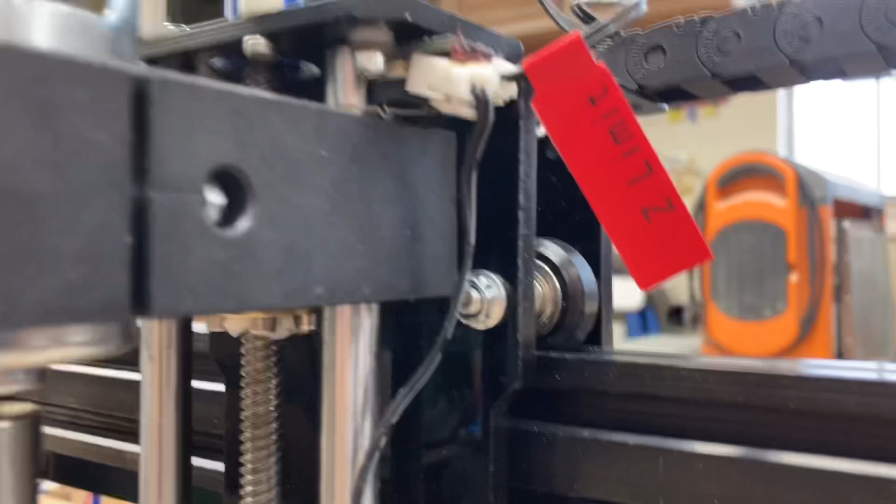Now as I move up on the Z-axis, all of a sudden it stops. Everything shut down. Why? Let's look at it. There is the limit switch. I tripped that and it stopped the machine.

Now this is an easy fix. All you have to do is go back into the Universal G-Code Sender and unlock it, which resets and deactivates the alarm. Then you'll be able to move it down again, and as soon as that switch is free, you can continue to move just as normal on the X, Y, and Z axis.

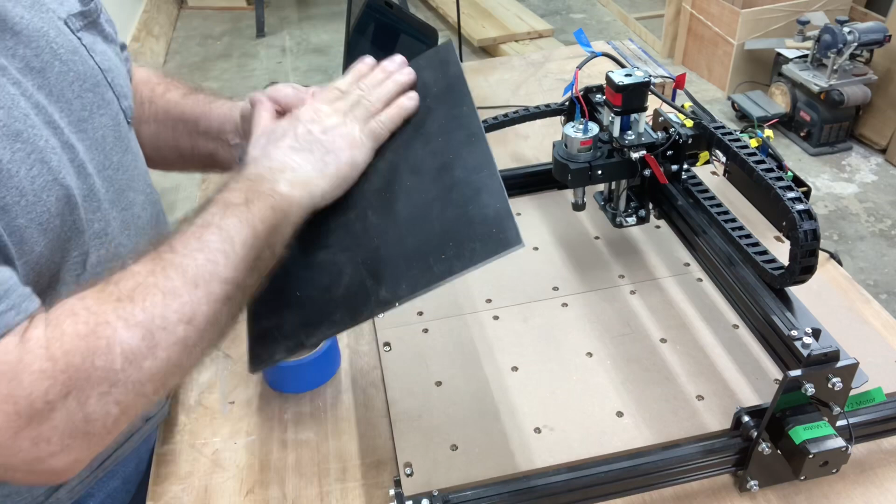The material I'm going to be using today is a piece of PVC, 1/4 inch thick. It was white originally; all I did was spray paint it black.

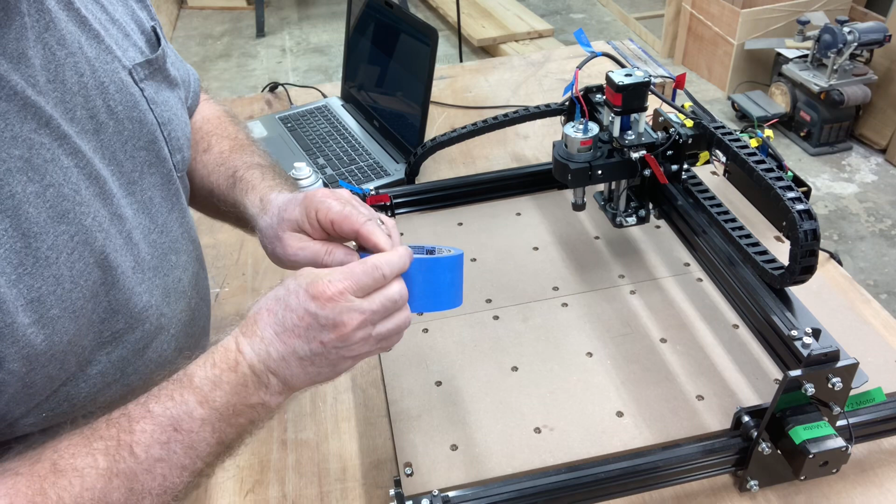I'm going to secure it to the CNC machine with my glue and tape method. To me this has been a fantastic way to do the hold down. I don't like to use clamps, and all that's necessary on a project like this is to put down, in my case, 3 strips of tape.

You do not need to cover the whole project with tape and glue. Three is, quite frankly, more than necessary — two would probably work just fine. But once I have the tape on the wasteboard, I'll repeat the same thing and put tape onto the project itself, again using 3 pieces.

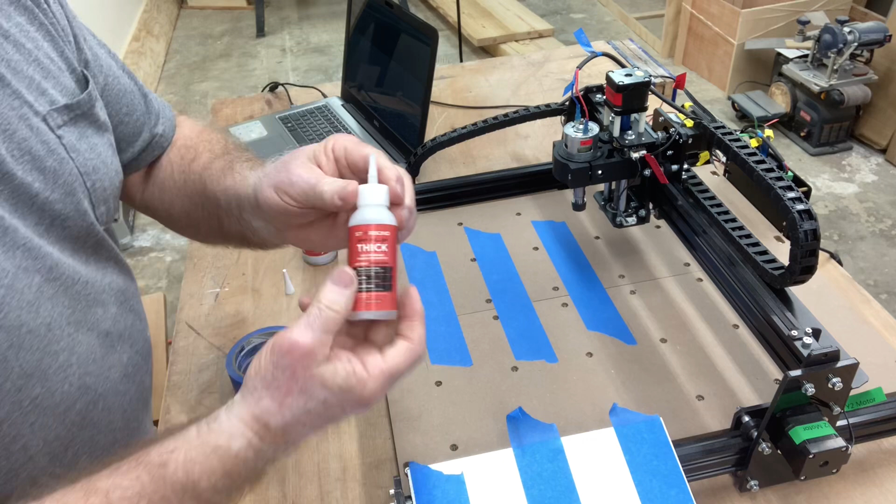Now the glue I'm using is Starbond glue, specifically the Starbond Thick glue. You can also use the Starbond thin or medium and it works just as well. I'm using the thick glue because that's what I have available, and it does an exceptional job.

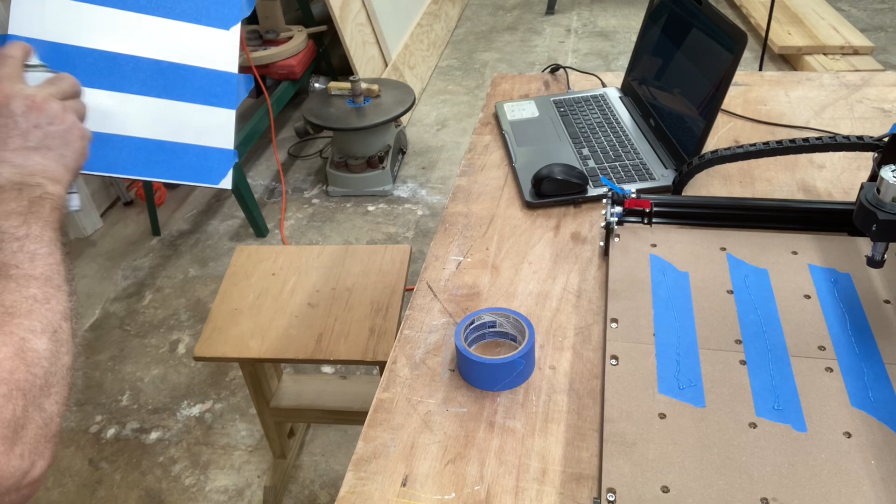All it takes is a single line of glue on the strips of tape, and then on the project board itself I use the accelerator and spray a little bit on there — it doesn't take a lot of the accelerator.

Now with this process completed, all that remains is to place the project board onto the wasteboard. You're just aligning the tape strips and pushing it into place, holding it just for a moment, and that glue bonds instantly so you're ready to carve.

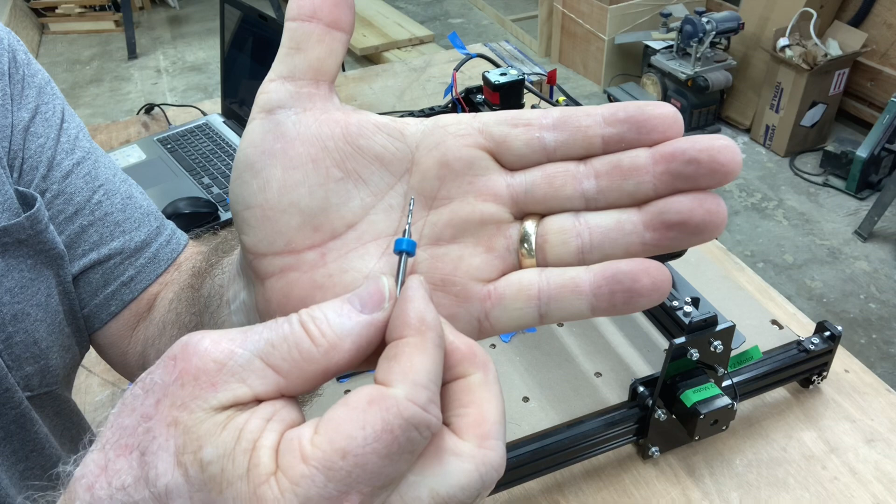Now the bit I'm using today is a 1/16 inch upcut bit, and what this will do is get that plastic up and out away from the project itself.

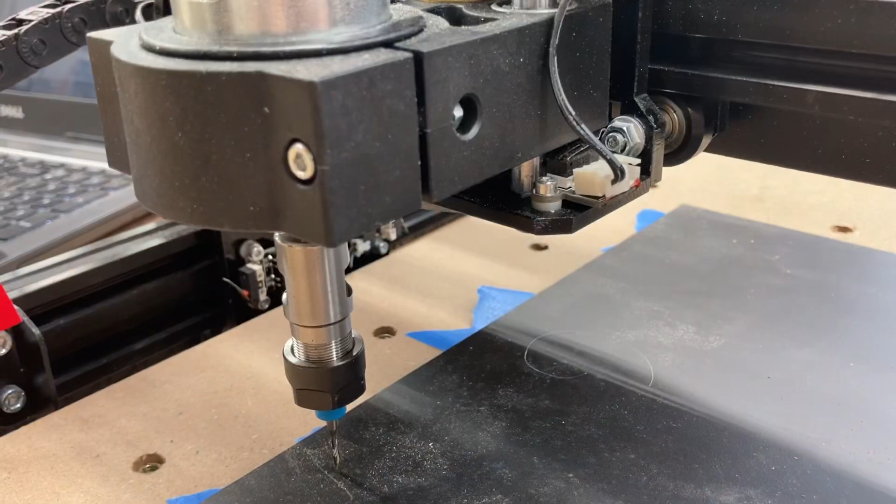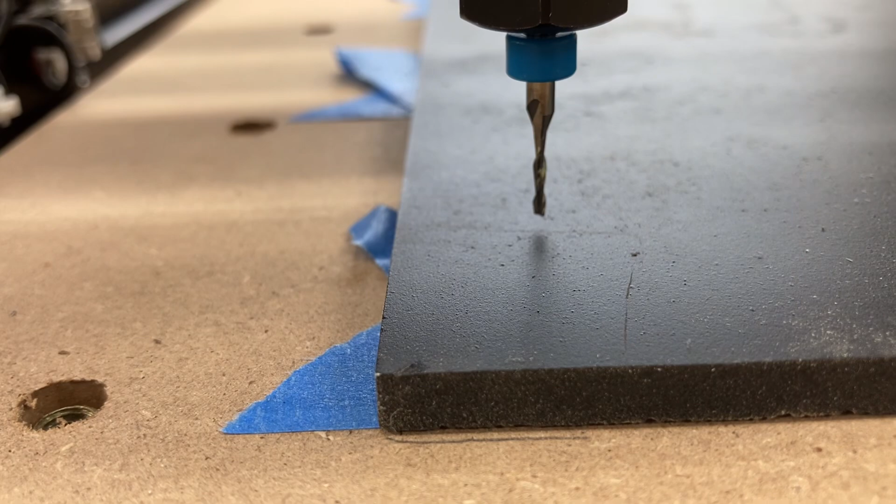Now at this point I want to go ahead and move the machine down and set the X, Y, and Z position to 0, using the mouse with the controls on the Universal G-Code Sender. Since this is the first time I'm using this machine and getting everything set up, you'll notice I'm not quite at the surface with the bit, but at the same time I have tripped the limit switch.

If I come over here and try to raise on the Z axis, nothing happens. So what I have to do is unlock this machine again, and now I can come over and raise it up.

Now what I'm going to do is loosen my spindle mount and lower it down further, and that will solve the problem. Let me grab the wrench and loosen this. We'll lower the spindle and continue on to set the Z-axis and the X and Y axis.

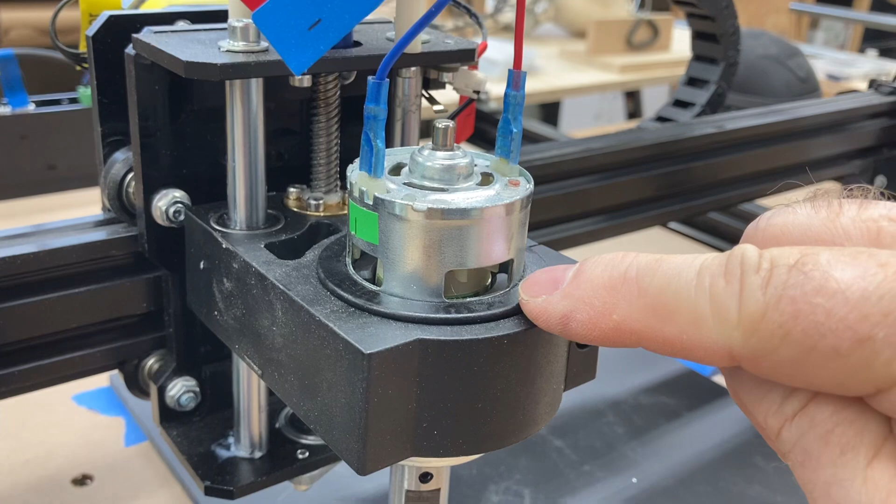So I've lowered the spindle now down till I'm right at this line where the fan is, and that's going to be low enough to be able to accomplish what I need to accomplish. Now at this point, I'm just going to go ahead and move this over to my XY0 position and get ready to carve it. Now the machine is all ready to be able to carve.

So now I want to switch the focus and talk about the actual software and how I got the project ready to carve using the Easel.

Now this is the file that I'm going to carve, and I have actually two workpieces down here. The first one I did, I actually have it set up for a 12 by 12. And when I did that, this was how I designed it. And if you look over at the preview, it worked real well and all of the lines are there.

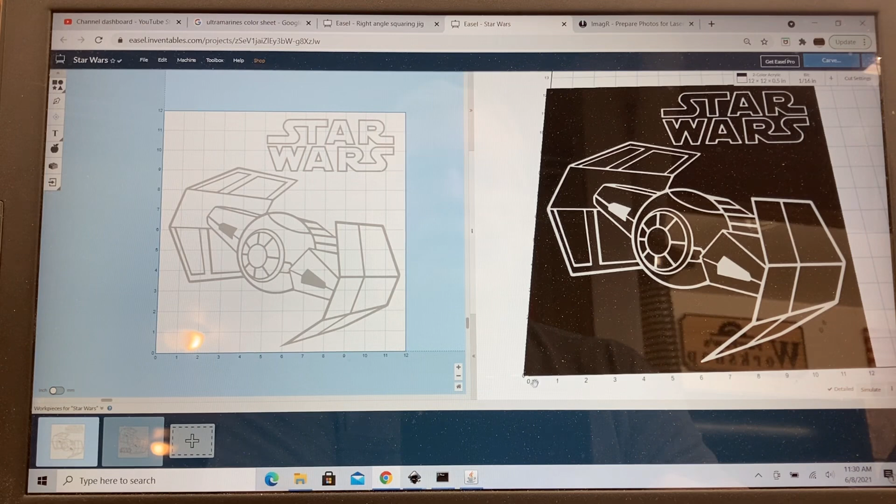When I switched over and realized that the material that I had was not 12 by 12, but actually 9 7/8 by 9 7/8, I went ahead and created my new workpiece, and I had to shrink this down. And when I did, I started to lose a lot of the detail in here. I had to change a few things. Star Wars now is actually cut out, and although this still looks really, really good, I've got to show you how I got to that point.

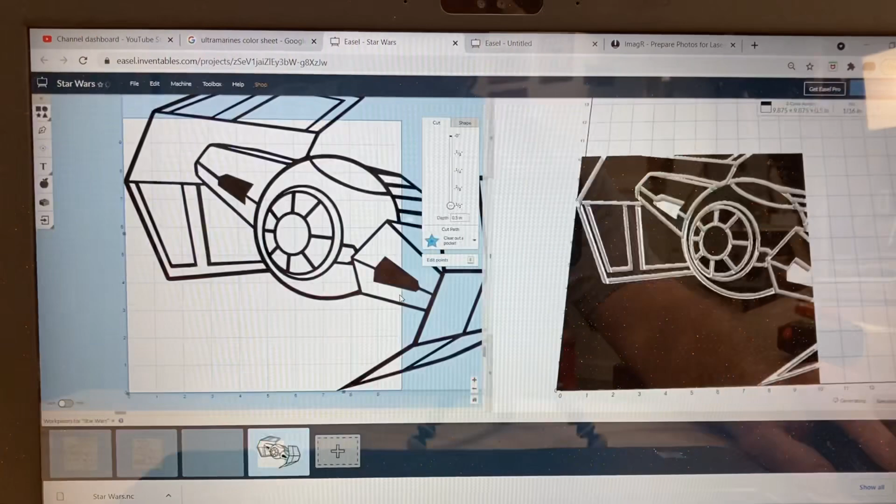So what I'm going to do is go ahead and open up a brand new workpiece, and I'm going to bring in this file. And this was an SVG file that I worked on in Inkscape. And this was the size of the original file. And when you look at that, that has all the fine detail that you want.

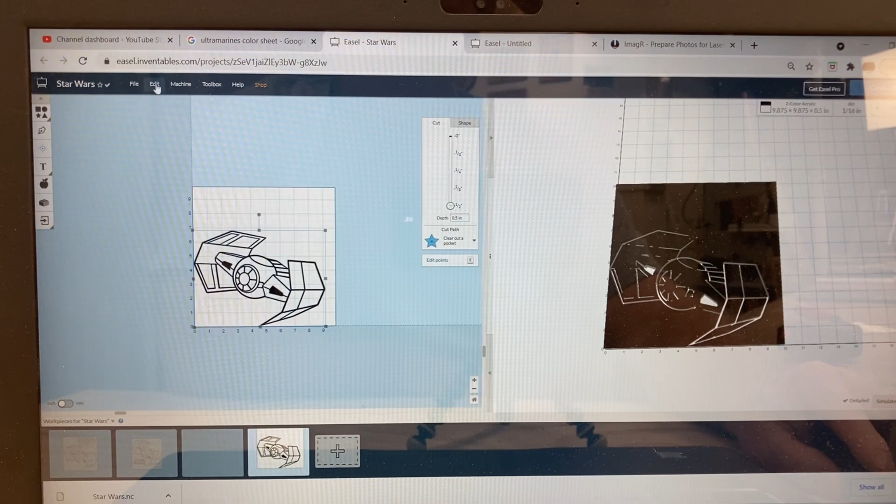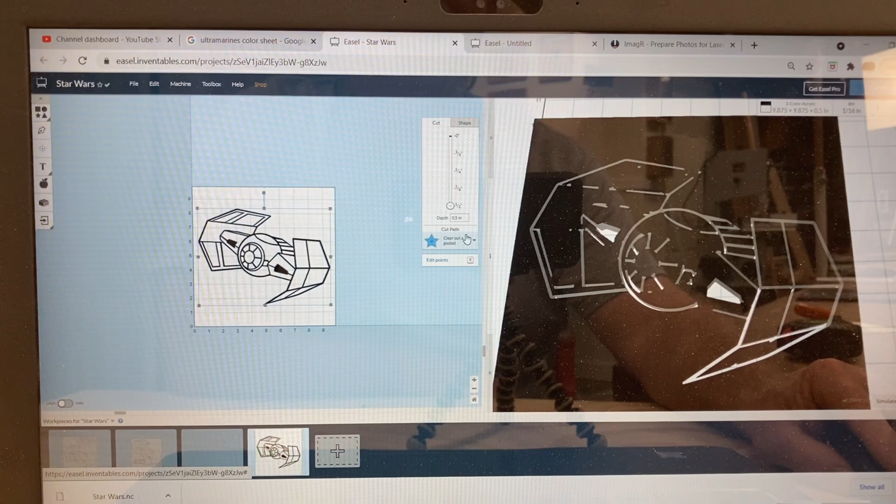The problem is though, let's scale this down. The problem is when you bring this down smaller and you fit it into that space, what happens then? Let me go ahead and hit edit, center to the material, and you can see over here a lot of the lines are disappearing. The reason being is this 1/16 of a bit is actually still too wide, and this area will not carve. A lot of times people have asked what is happening and why is this not looking the way this looks? Well, now you know.

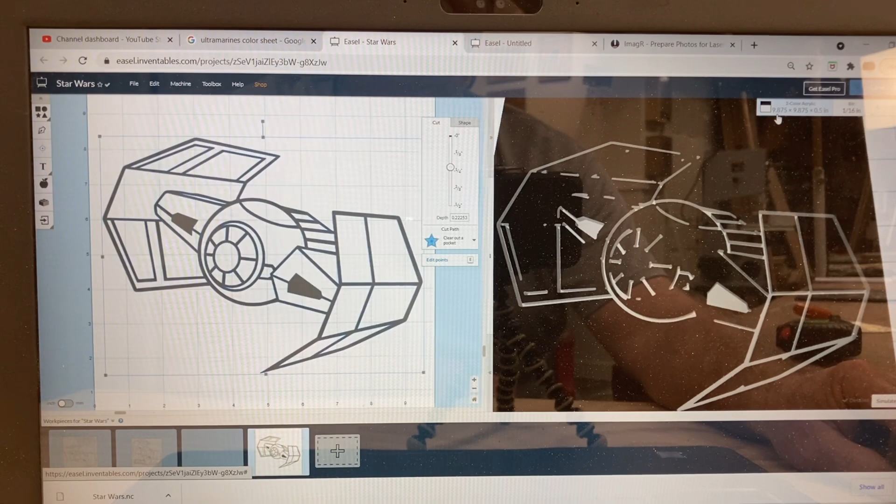To be able to correct that, you have to go into the edit nodes. And in Easel, that's actually real easy to be able to do. So let me zoom this in a little bit. And first thing I want to do is get the size of my material. We've got 9.875 by the 9.875. And let's make this fit into that space.

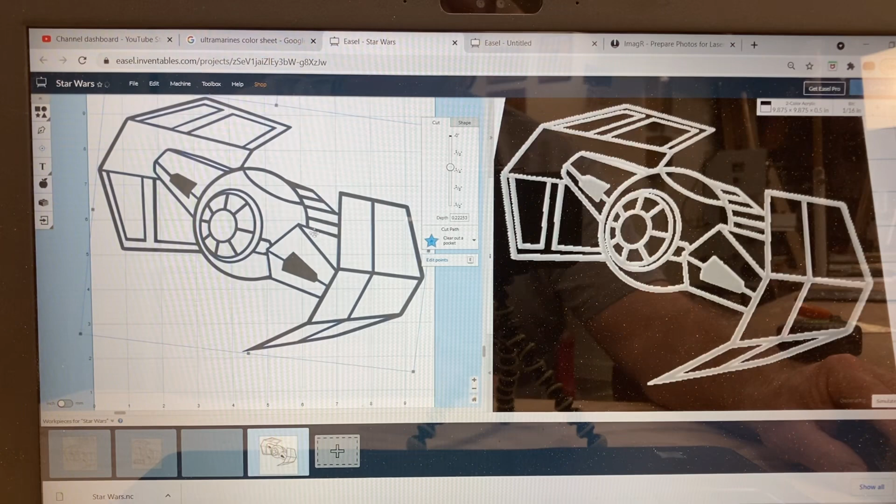And I'm going to rotate this a little bit. And we'll slide it up to the top. And you can see all of these lines are missing. And we've got to be able to get those lines back. And you can see right here just how thin they are.

So what I want to do is zoom in real close just to this area. Then I'm going to click on this and hit edit nodes. You can see that there are a lot of nodes in here. And what I want to be able to do is change these nodes. First thing I'm going to do is delete some of them. I don't need all of these nodes.

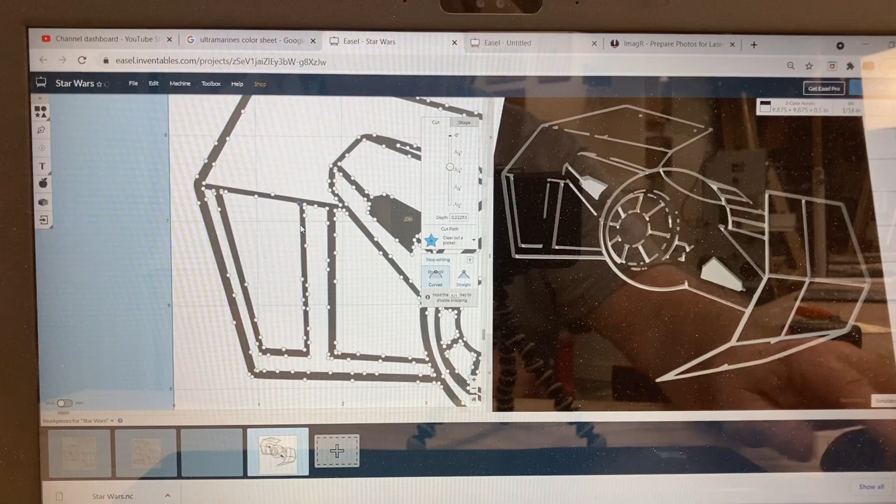And you see this line is missing, and I'm just going to show you this line. So I'm going to go ahead and delete some nodes in here. So it cleans it up and makes it a much easier, smoother design to be able to work with.

Let's see, let's get that one. Then we get that one out, that one out, that one, and that one. Over here, I can go ahead and get this one out. Now you see what happens there? That actually took too much. So all you need to do is come back to edit and undo that point, and you can see that it's back. I didn't want to take this corner out.

What I wanted to do is take this one out. And I want to take this one right here. And we'll take that one out. Now we have pretty much a straight line. Over here we can begin to see it.

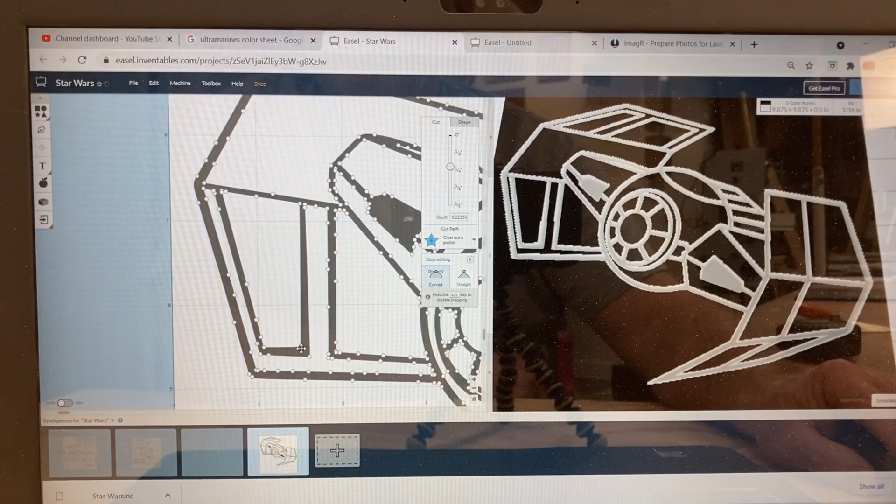But what I can do is make this even better, because this line right here is still not showing up. So I'm going to delete this one. Want that gone. And then I can take this node right here and I can move it. Don't want to move it that much, but I do want to grab and pull this down just a little bit.

And then to see how this narrows, I'm going to take this node right there, move it, slide it over just a little bit, back up, and release it. Now you can see that I have that whole entire line.

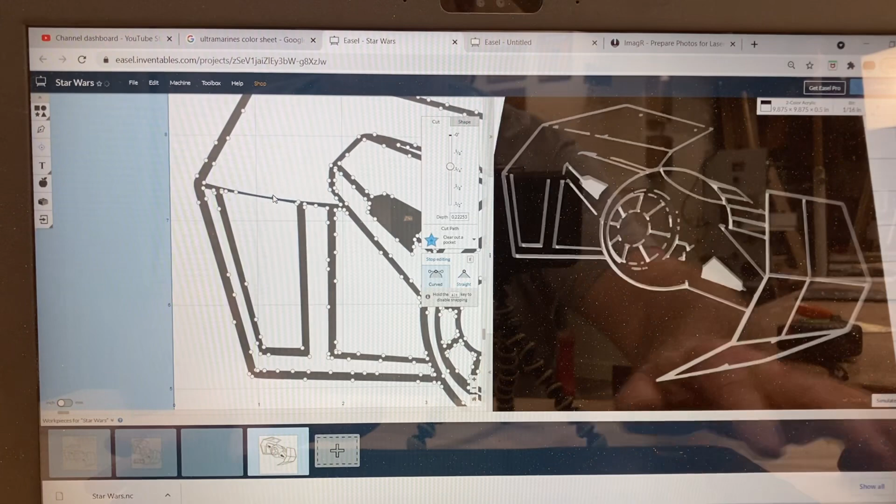Over here, because this line is missing, I'm going to go ahead and delete this point, and delete this point. Then I think I can delete this one. Now I have just this corner, and this is still missing.

So I'm going to take this line right there and pull it down just a little bit and make that line wider. That's the one that I want. We're going to pull it down wider. That's probably too wide. Release that, and now you can see that it's there.

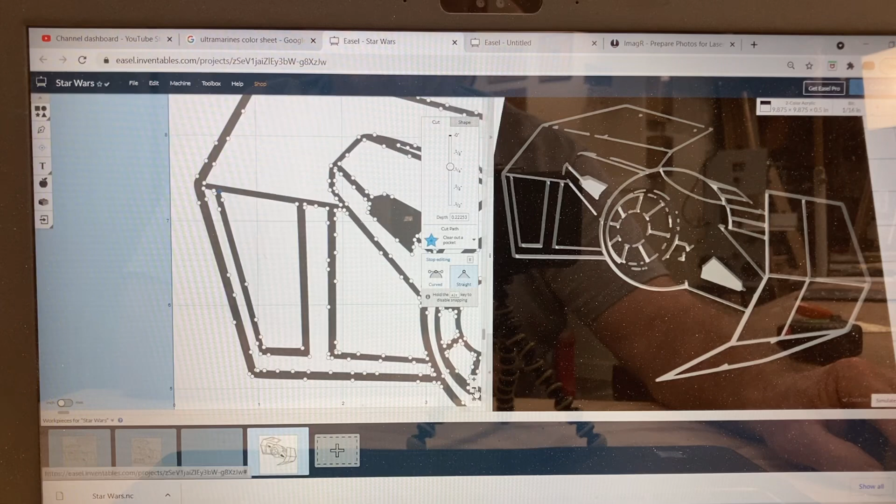And this is the process that I'm going to go through this entire project. Because as you look at this, there are tons of nodes, and I can eliminate a lot of those nodes to be able to make it show up. And you can see this whole area up here, the same thing will happen. I'm going to go through and edit these nodes, move those nodes over so that it makes these lines wider.

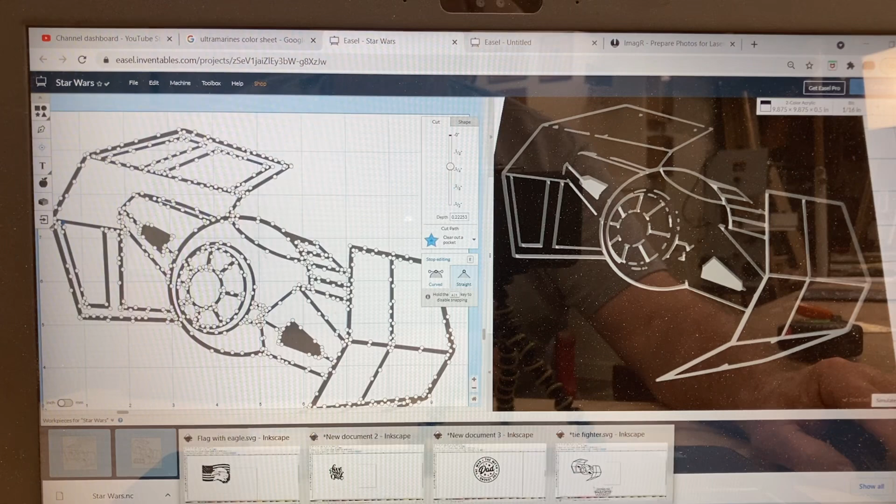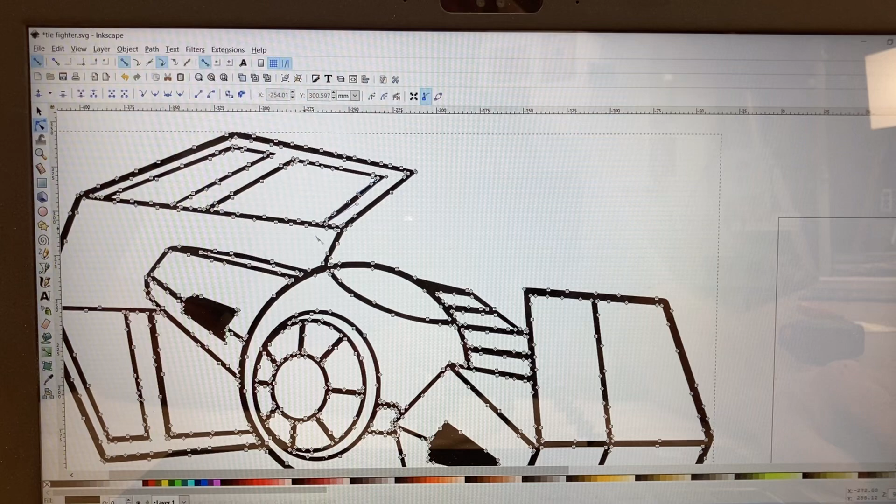This also could be done in Inkscape. If I go back over to Inkscape and pull up this file, you can see this is the image. So the same process can be done in Inkscape, but you don't see the immediate results, because I can go through and take out these various nodes just like I did in Easel, but you really can't see the results if that line is wide enough. So that's the reason I like to be able to do the final edit in the Easel software, so I can see the results immediately.

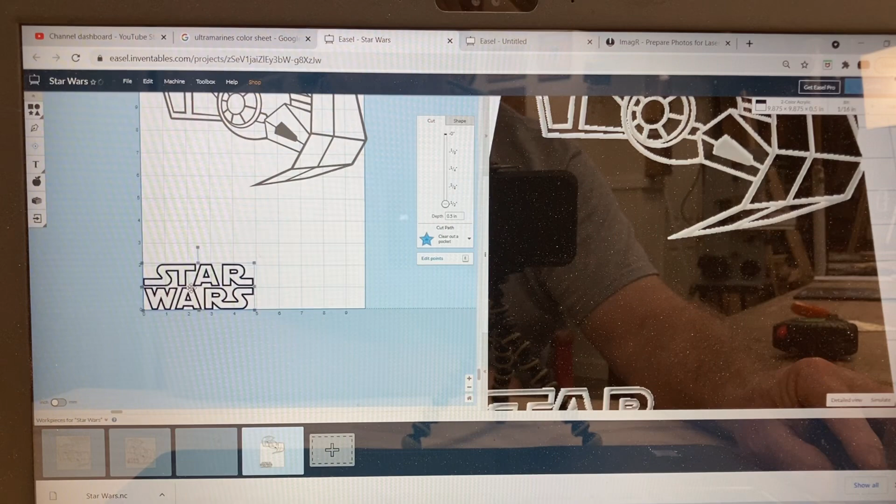Now the other problem that I had was the Star Wars logo. Let's go back over to Easel. Now when I opened up the Star Wars logo, you can see the size of it, and it's quite large. So if I highlight this and reduce it down to a size that will fit into my project, we'll slide it up just a little bit so we can work with it. I know this needed to be smaller.

And now this really just does not look good, and I didn't like the way that would look. So we're going to do the same thing here. I'm going to zoom in real close and show you what I did.

By being able to edit the points, you can see that there is a double line here. Let me zoom in even closer so you can see the double line. What I want to be able to do is delete this double line, so I can come right in here and delete it, and we'll delete this.

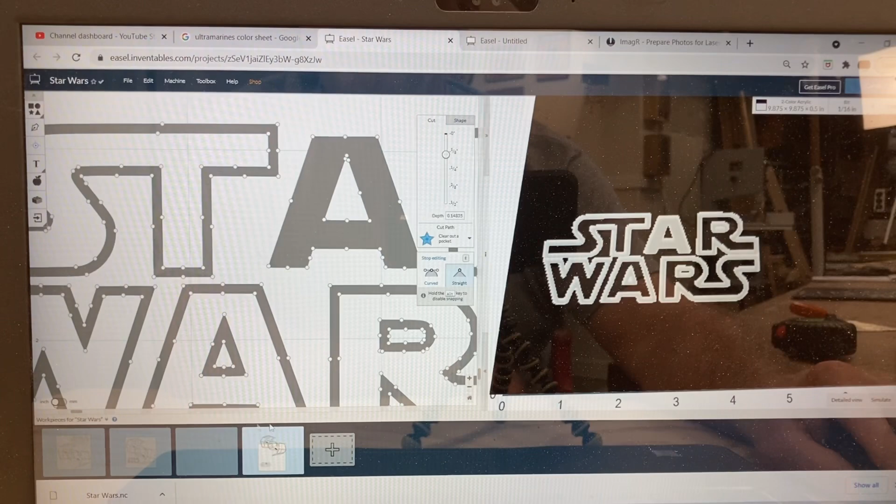We'll make this cut shallower. We don't need to have it cut that way. And now you can see the letter is cut this direction. So we'll do the same thing with this. Let me zoom out a little bit, and we'll slide over. I want to take the outer line and we'll delete it.

And that's how I did this process to make it look really nice and good when I carved it, because this just did not look right. And this is the final result, where everything fits into the smaller space. All my lines are nice full lines so that they can be able to be carved, and the Star Wars actually looks good with the black background.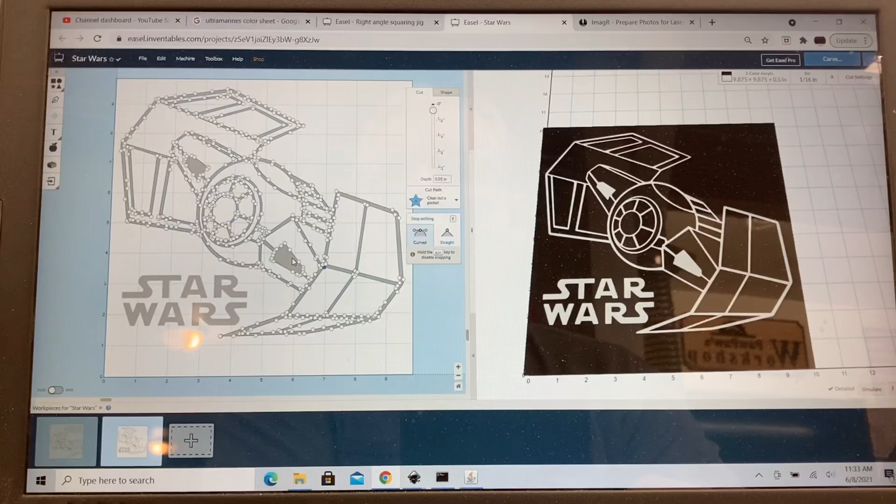Now, after we have everything done, and this is set up the way that we want, we have to be able to save the G-code. So you come up here to the machine, and we go down to the advanced. At this point, you notice that my spindle control is on automatic. I have all of the different safety heights, step overs, everything set in here, and I'm going to leave that just the way it is.

So for now, I'm going to go ahead and select Generate the G-code, and now I'm going to export it. Now this is going to export because I didn't put a name down at the bottom on the workpiece, so it's going to save this file just simply as Star Wars. And you see that right here.

starwars.nc. After you open the Universal G-code sender, one of the things that I want to show you is by typing in the $$, and hit enter, that's actually going to bring up the GRBL settings. This is important for using this machine, because down here you have the maximum spindle speed, which is line 30, and that's equal to 10,000. Normally, if you look at yours, I will pretty much bet you that line 31 is going to say 0, which is the minimum spindle speed. You need to change that to 10,000.

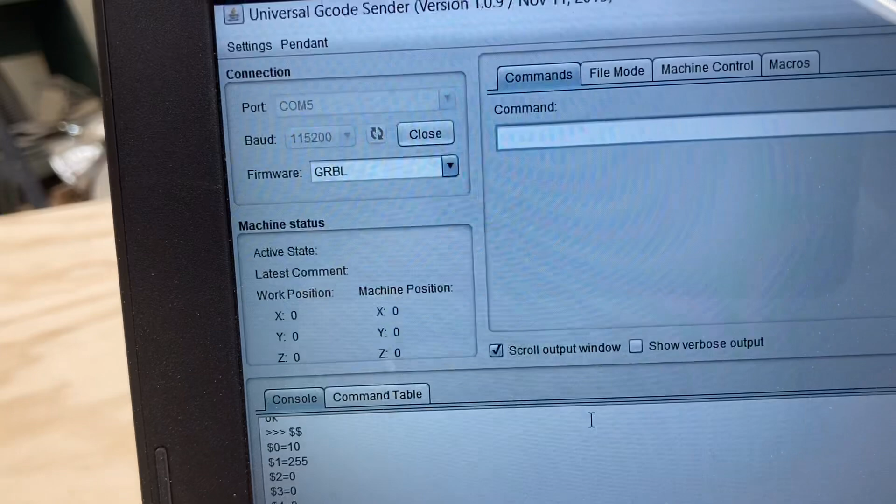To be able to do that, just come right up here to this line and type in the $31 equals, and then the 10,000.

By being able to do that and then hit enter, you will get this as the result, and that's what you need to have. Here's why: when you're designing in Easel and you save the G-code, you can activate this section where it will turn the spindle on or off, but you cannot control the spindle speed. So that's why this setting must be done.

I have the machine now set at the X, Y, and Z position all at 0, so I'm ready to carve now. Over at the computer, I went ahead and reset everything, and the X, Y, and Z are all 0.

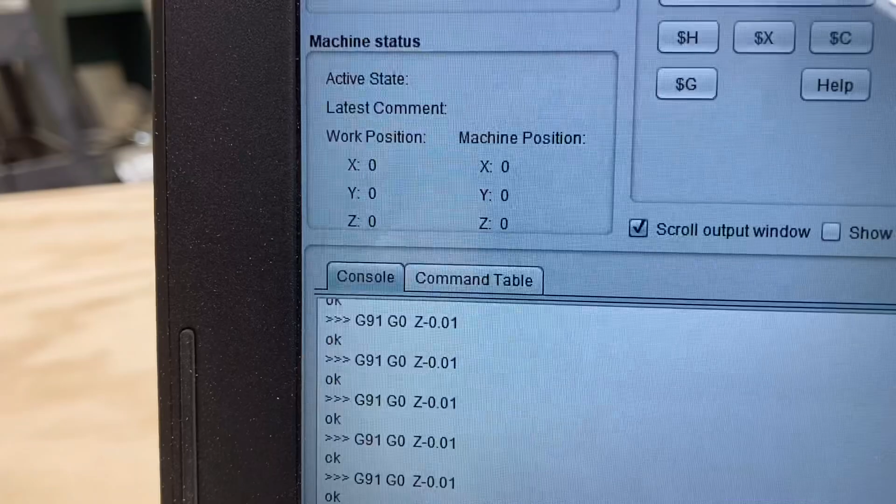Now the next thing to do is go over to the file mode, and we're going to pull up the file. I'm going to hit browse, come down to my file folder, scroll across and find my Star Wars file right here, starwars.nc. The NC represents the G-code. So we'll click on that, open the file, and you'll see it displayed right here.

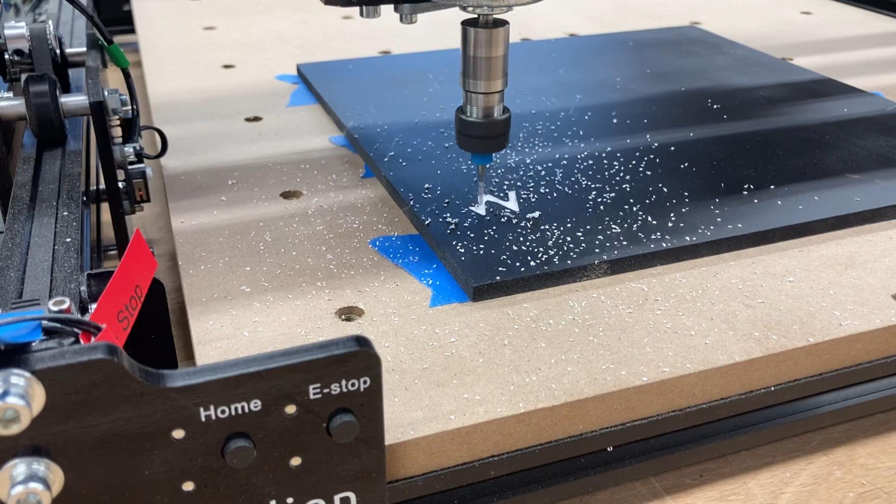Now all I need to do is hit send, and you see the spindle turns on and it begins the carving. Now I must say, the first time I did this, everything was moving exactly as it should, and I hit send and the spindle did not turn on. By adjusting that setting where I changed in GRBL the $31 equals 10,000, it is now carving perfectly.

The other thing I want to point out is that this is a very quiet machine. This is a 60-watt spindle, and I have not adjusted the volume at all. So quite frankly, if you were in the next room, you would not really hear this machine at all.

Now, one of the things I would like to request from all the experts out there: if you know of a different way to turn the spindle on without changing the minimum spindle speed to that 10,000, please let me know in the comments, because this is an opportunity for all of us to learn together.

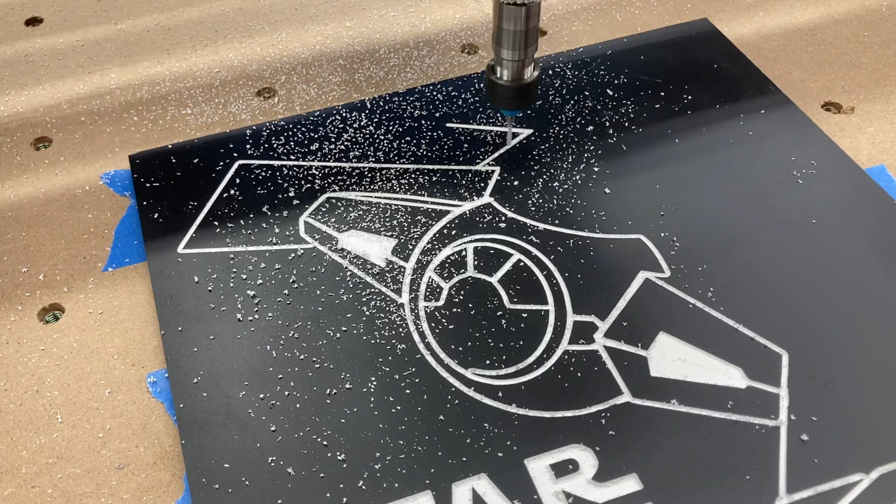But this was my way of being able to get the machine to carve and do a perfect job. I really like how this is carving. It's doing it very clean, and it looks outstanding. Now the one thing I did do is set this up for a total depth of 0.05. The depth per pass was 0.03. That means it carves the first pass at 0.03, then comes back and carves the second pass as a cleanup pass at 0.02. And that worked extremely well. Yes, it does increase your time to complete the carve, but the results are amazing.

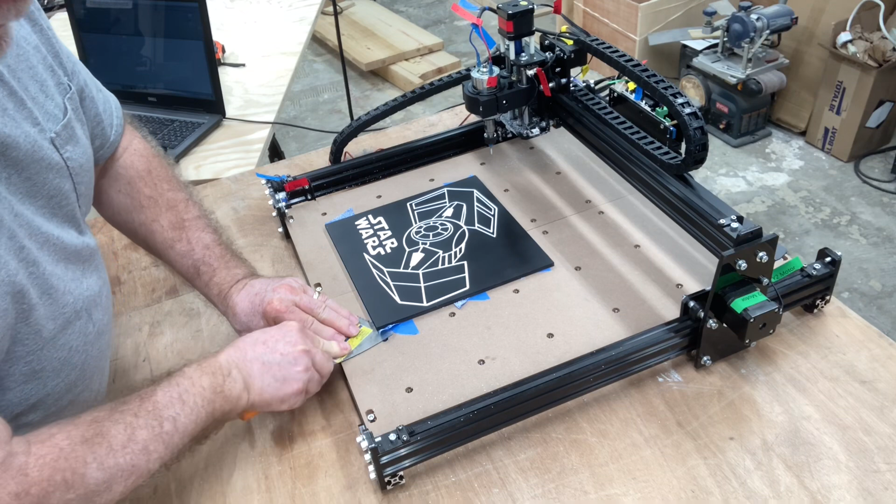All finished now, and I want to show you on releasing this tape. The best way to do it is just get a putty knife underneath and begin to raise slowly. Because if there's ever a doubt that this will not hold well, you ought to look at this. This shows you just how well it holds.

I really don't know why more people don't use the glue and tape method, but it works so well. People often say that they're afraid it's going to come loose. Well, if you look at this, it is not coming loose.

There it is. And we'll just peel that off the back. Take the tape off of the wasteboard. And you never have to worry about damaging the wasteboard. There you go. It still looks brand new.

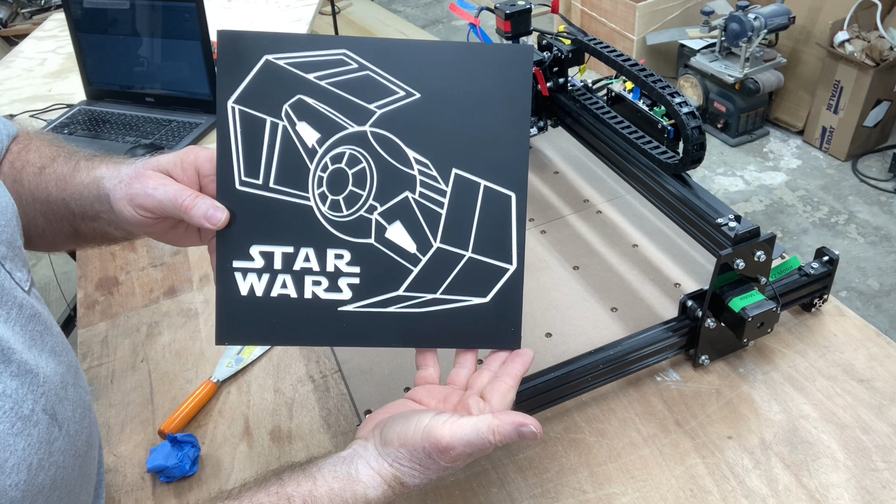Now if you look at that, that turned out just absolutely beautiful. I think my son's going to like this. This is a perfect entry-level CNC machine. Really like how it carves. Thank you very much for watching today, and I look forward to seeing you on the next video.